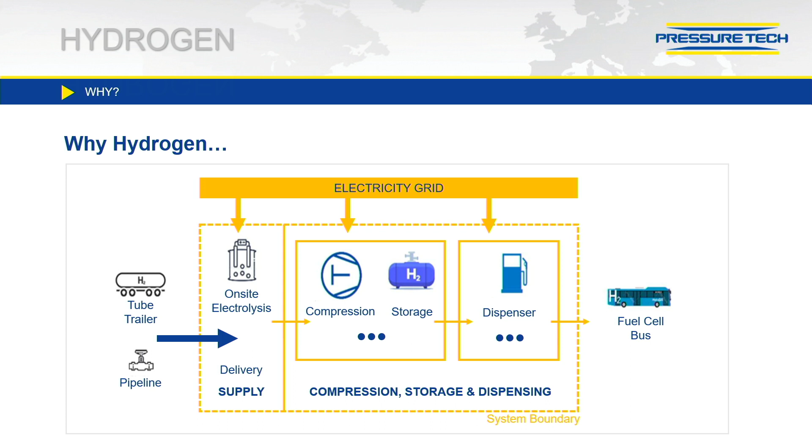Look at the electric grid behind me - here at Pressure Tech, our experience in the energy market has made the transition to hydrogen seamless. When we began within the hydrogen industry, we wanted to cover as many bases as possible. That includes electrolyzers, compression, storage, distribution, and distribution throughout fuel cells and ICE engines. That's our main focus at Pressure Tech.

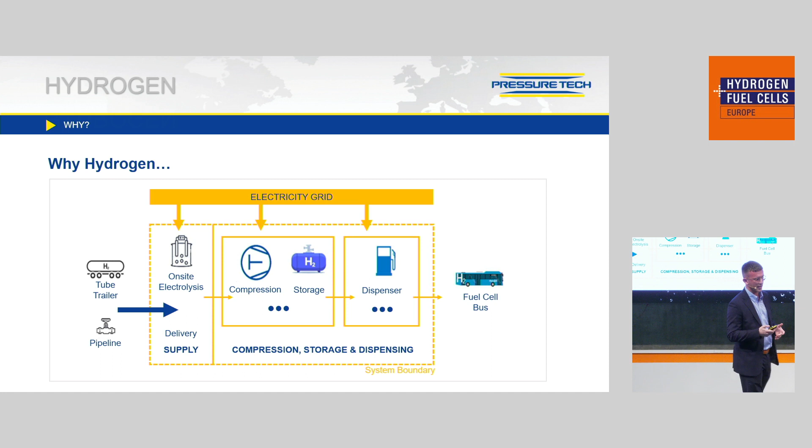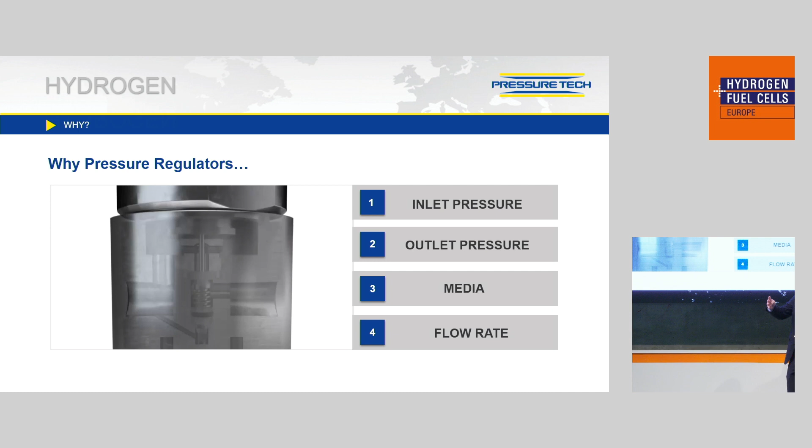Why pressure regulators? Pressure regulators are mechanical devices that take a large pressure to a small pressure. There are 2 types: back pressure regulators and forward reducing pressure regulators. Back pressure controls upstream pressure, and forward reducing controls downstream pressure. The 4 factors that go into the design of a regulator are: inlet pressure, outlet pressure, media, and flow rate. As you can see from the diagram, if it's going to load.

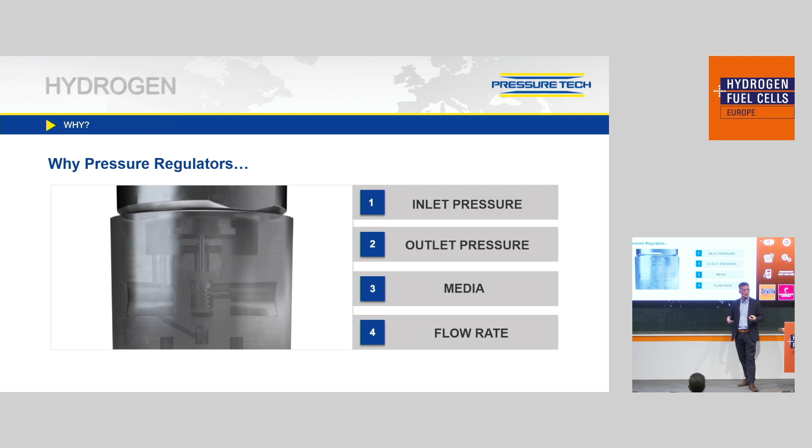So for example, in a hydrogen application, 350 bar is the inlet or storage pressure. The outlet pressure could be 10 bar, the media obviously hydrogen, and the flow rate perhaps 5 grams a second. As the pressure regulator is compressed against the spring, you build up the outlet pressure. This is the application required across fuel cell applications, ICE engines, refueling stations, and of course electrolyzers for back pressure regulators.

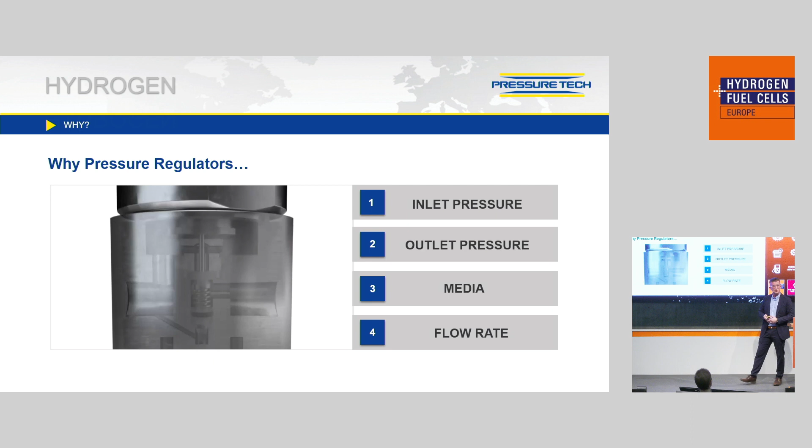Bit of a technical difficulty, maybe. Sorry, could we change the slide please? Sorry about this guys. There we are, OK, we'll just leave it there.

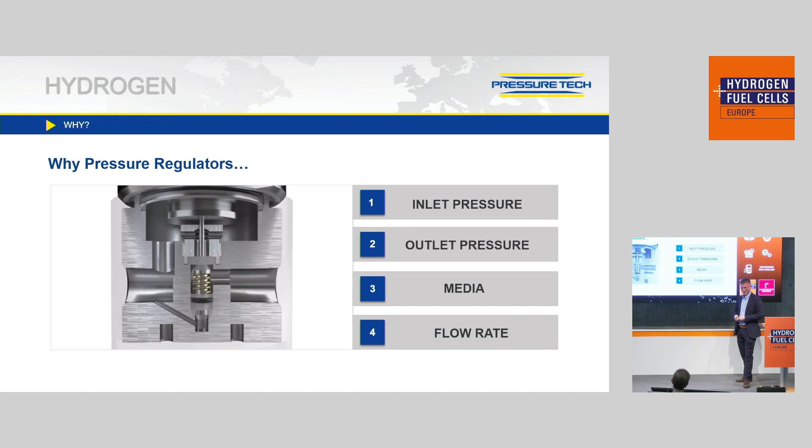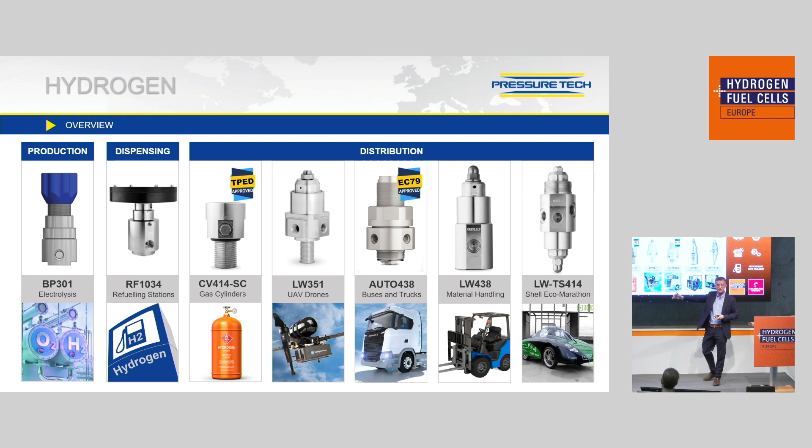Beginning with electrolyzers, or production - what is an electrolyzer? I'm sure you've all heard it before. It's electrifying water to create hydrogen and oxygen. The electrolyzers here today require back pressure regulators to control the pressure being produced. Both the hydrogen and the oxygen require back pressure regulators, usually around 35 bar. What will vary is the flow rate, and the flow rate defines the CV size of the pressure regulator.

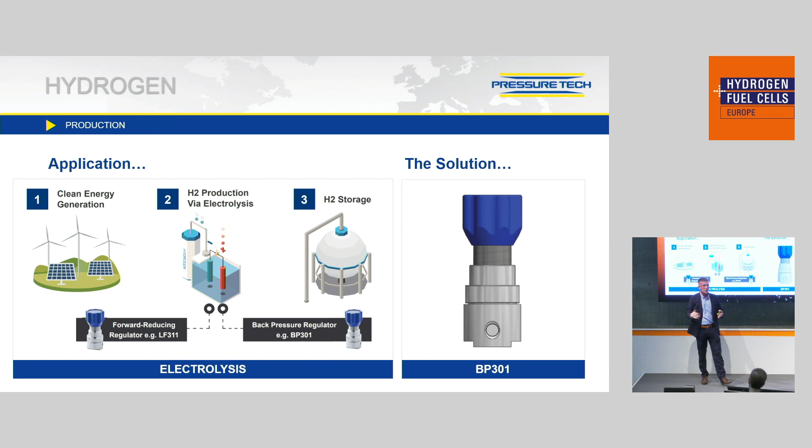The CV size relates to the orifice size of the pressure regulator. So a 1 megawatt electrolyzer may use 500 liters per minute, and a 2 megawatt electrolyzer may use 1,000 liters per minute. So this is how it varies in that sense.

Dispensing, so refueling station. Now, as the hydrogen industry has evolved, we found that design standards and certifications have become especially paramount. For the design of pressure regulators, there are two main standards: SAE J2601 and ISO 19880.

SAE J2601 is the diagram behind me. That covers everything before the nozzle and how it affects the main basis behind it. It prevents overpressure and overheating. The pressure requirement for 350 bar systems is 438 bar, and the maximum pressure for 700 bar systems is 875 bar. In terms of temperature, the minimum is minus 40 degrees, and the maximum is plus 85 degrees. So these are the factors that go into the design of a pressure regulator.

It also defines the flow rates: 60 grams a second, 120 grams a second, and 180 grams a second. What we're also seeing is demand for faster and faster refueling as demand for refueling stations also increases. So we're seeing a flow rate of 300 grams a second, and this also affects the CV size of the pressure regulator.

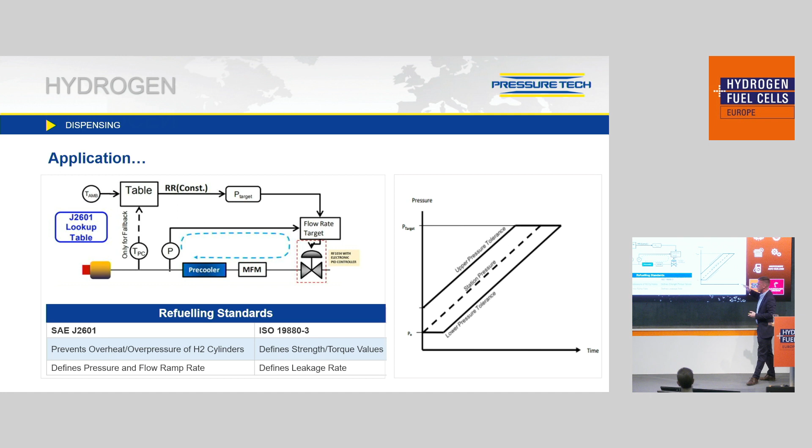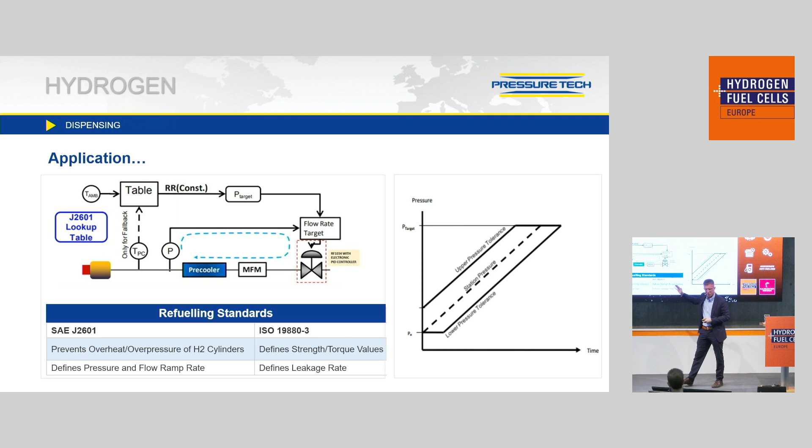Our pressure regulator, shown here, has been designed to be responsive enough to stay within what we call the pressure corridor. The diagram on the right defines the maximum and minimum pressure. So say you're refueling a vehicle at 300 bar, the maximum pressure at that point is 370, and the minimum is 275. Our regulator is responsive enough to stay within those parameters of the pressure corridor, as you can see with the RF1034 pressure regulator here.

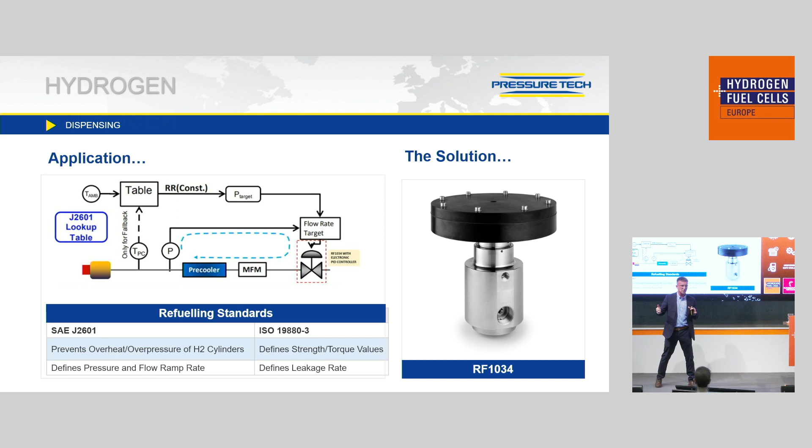What goes into the design of the valve is defined by the ISO 19880 standard, which defines the strength, torque, and leakage values of this pressure regulator. Regarding strength values, the maximum pressure the regulator can take is 2.4 times the maximum working pressure, which is over 2,500 bar. This regulator is over-designed so that if any catastrophe were to happen in the refueling station, it will withstand that pressure and withstand the hydrogen.

Moving on to buses and trucks. We've designed the Auto 438 pressure regulator to fit onto a hydrogen fuel cell vehicle. This will take 350 bar down to 10 bar for the fuel cell. It's situated downstream of the hydrogen cylinders and upstream of the fuel cell.

Now, the certification required to sell this pressure regulator for these hydrogen fuel cell vehicles is called EC79. EC79 is a certification that requires the regulator to go through 90,000 cycles of testing, which equates to a 10 year life cycle. Alongside that, the shell pressure, the leakage pressure - all of these factors go in to make sure this design is very robust.

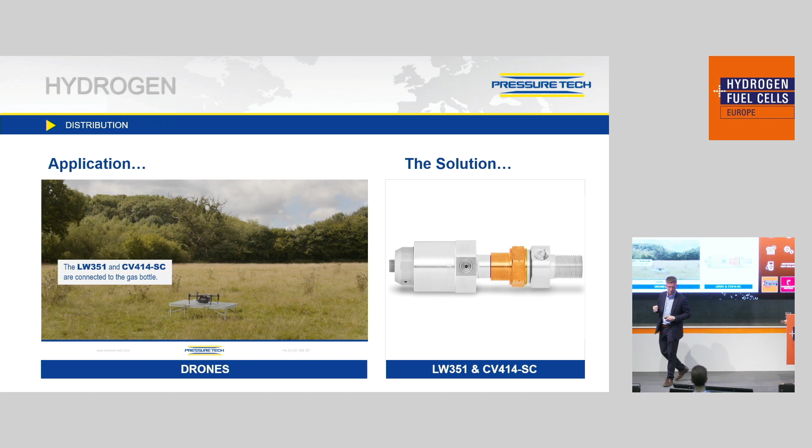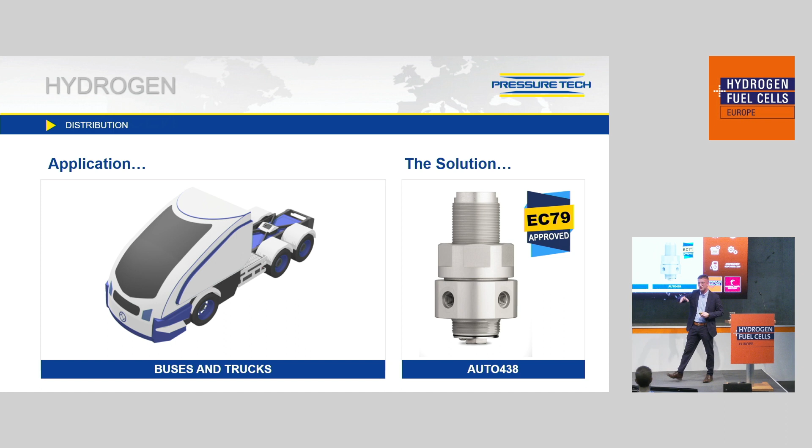Finally, the first pressure regulator we ever developed was the LW351. It's a lightweight regulator that fits onto drones. The drone market was using electrolyzed, electrified drones before, and now they're using hydrogen drones to extend the range. Our pressure regulator weighs only 200 grams and brings 350 bar down to half a bar.

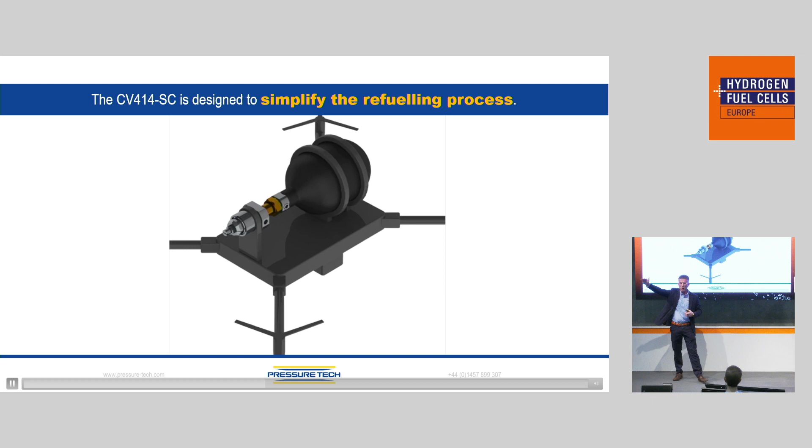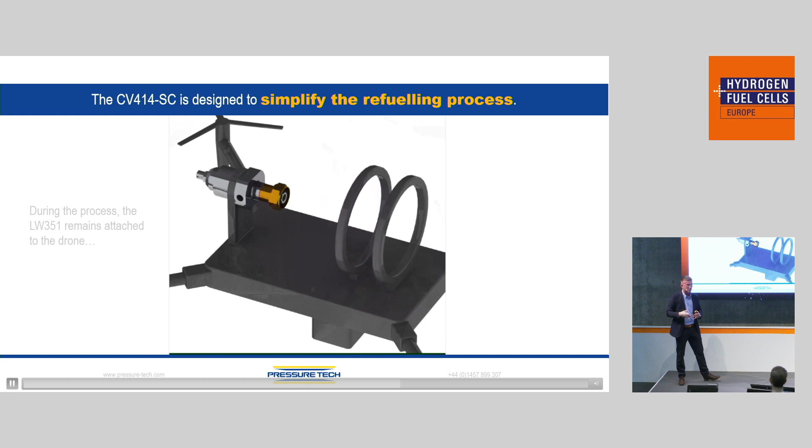As you can see from the diagram, the pressure regulator stays on the drone, whilst the CV414 cylinder valve, which works as a check valve, stays with the hydrogen cylinder. This allows really quick and safe refueling, as well as minimizing downtime when you want to get the drone back in the air. You can change over the bottle with another cylinder valve that screws onto the pressure regulator. Once it screws on, the hydrogen can flow and the drone goes back in the air.

When it comes to refueling, you can use our refueling nozzle to quickly and safely refuel the hydrogen cylinder without the need for check valves, hoses, or pipes. This refueling nozzle screws onto our cylinder valve and connects to a larger volume cylinder, and can refuel a small-scale drone, boat, or bike cylinder with ease. So that's the system: the LW351 on the left, and the CV414 cylinder valve on the right.